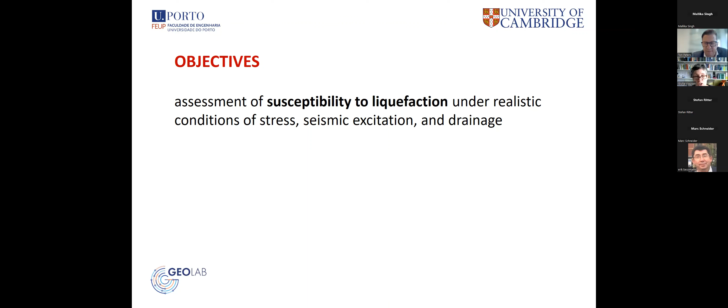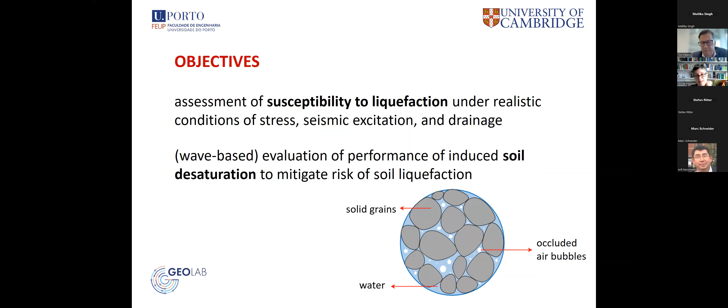So the objectives of the project were to assess the susceptibility to liquefaction of sandy deposits under realistic conditions of stress, seismic excitation and drainage, and to evaluate the performance of a mitigation measure, namely induced soil desaturation, to mitigate the risk of soil liquefaction. Now, this is wave-based in the sense that we were propagating S waves and P waves through a sample of soil while in flight on the centrifuge to see whether this induced desaturation was reducing the risk of liquefaction.

Now, the team was essentially a Portuguese team. The leader was Cristiana Ferreira, who is a research associate professor at University of Porto, and she was assisted by two young researchers, one PhD student from Iran working in Portugal and one research associate from Colombia, and Professor Antonio Viana da Fonseca, who was the most senior member of the team. There was also one intern, Arianna Pucci, coming from Italy and joining the activities of the team during the project.

Now, this is a very experienced team on this topic, both from the point of view of the interpretation of wave propagation methods, both P and S waves, and also the connections between wave velocity, degree of saturation, and risk of liquefaction.

We tested two models. They were both created in Hostun sand at a relative density of 40%, and one of them was fully saturated using methyl cellulose solution, not water. This is to render compatible from the scaling point of view the seismic times, the dynamic times, and the times of consolidation.

And the models were heavily instrumented. So you can see that there were three layers of bender elements. They were propagating S waves and P waves in the direction orthogonal to the direction of shaking during the seismic events.

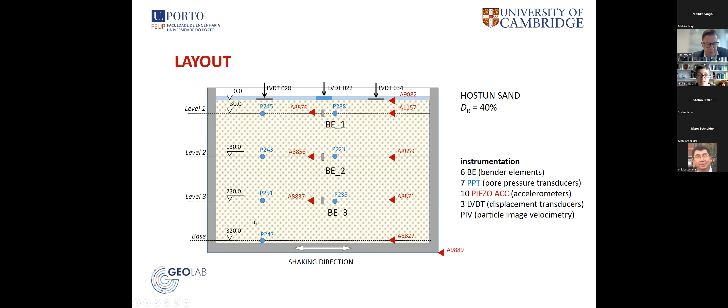And I'm always talking about this induced desaturation. This was created by injecting compressed air from the bottom of the sample in a number of ports. In this way, we were creating bubbles of air inside the soil, and the Bender elements would be in regions where the soil was not saturated anymore. And Bender element measurements of shear wave velocity and observations about excess pore water pressure during shaking were taken for the saturated and the desaturated models.

Now, I don't know how many zillions of traces of Bender elements were acquired during these tests, and I know from Cristiana and her team that they are still busy processing the results, but there is very strong evidence that this technique of induced desaturation was very effective in reducing surface settlements and reducing the risk of liquefaction.

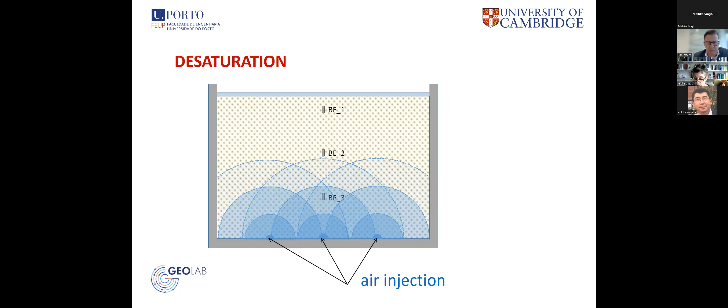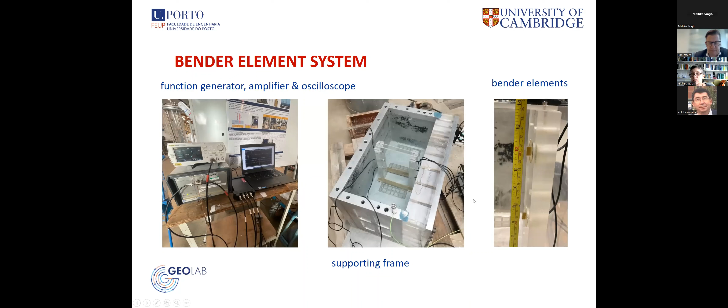These are some slides from the actual experimental work. So this is the Bender element system, which included the function generator, an amplifier, and an oscilloscope. The Bender elements, as I told you, were propagating shear waves in the direction orthogonal to the direction of shaking, and the Bender elements were mounted on this perspex frame. You can see here the Bender elements protruding into the soil sample. So these were shear waves that were horizontally polarized and traveling horizontally.

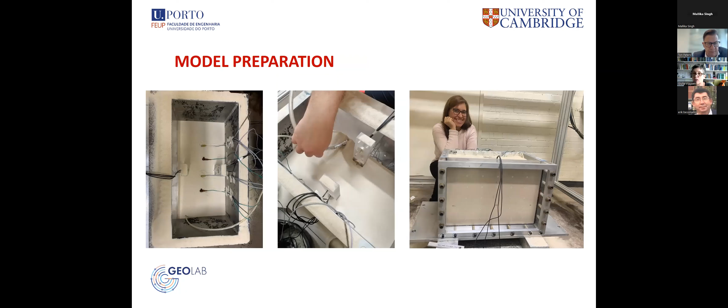And here you can see model preparation. So as the sand is pluviated, the instruments are placed, accelerometers and pore water pressure transducers, at the different heights in which they are supposed to be. Here you can see the two columns of the frame that are supporting the Bender elements. The top of the frame is only connected after the sand has been completely poured. This is more on instrument preparation, and this is a very happy Cristiana Ferreira once the first model was completely prepared. And here you can see the model once it's been placed on the shaking table.

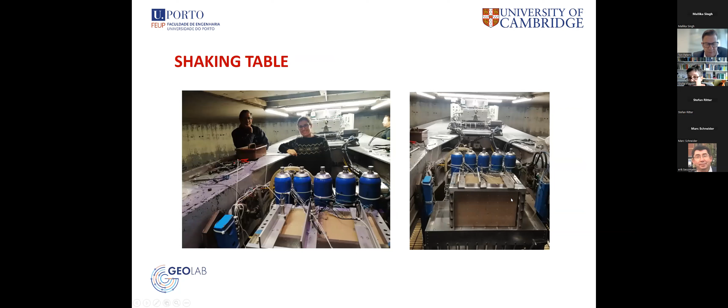So there is this servo hydraulic shaker that can simulate all sorts of dynamic histories. And also you can see here that there are 3 LVDTs that are measuring the surface settlements of the sample directly, besides the PIV, which is done through this perspex window on the sample. Here is Fausto Molina, still in the centrifuge, but the model is absolutely ready to fly. This is a view from inside the Cambridge centrifuge.

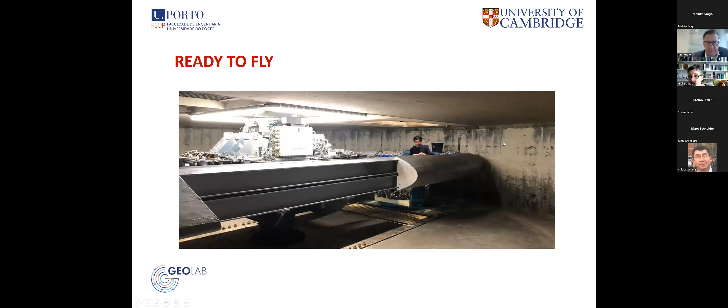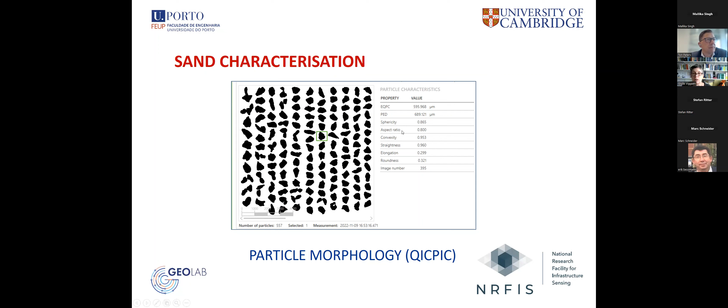And I just wanted to mention that together with the centrifuge testing, which were the main activities, there were a set of parallel activities which took place in the geotechnical laboratories of the Cambridge National Research Facility for Infrastructure Sensing, which included sand characterization. So the Hostun sand that was used in the test was fully characterized in terms of particle morphology using QicPic equipment that looks at the particles as they fall in front of a stroboscopic light, and pictures are taken. So you can look at a number of morphological parameters, including sphericity, aspect ratio, and the like.

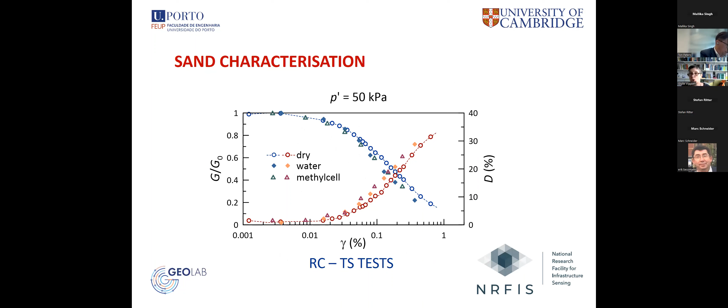And resonant column torsional shear tests were carried out on the sand, in dry conditions, in water saturated conditions, and saturated using the same methyl cellulose solution that was used for the actual tests, so as to have direct measurements of small strain modulus and damping ratio from representative samples of the soil. Now, the sand characterization was mostly carried out by the intern, Arianna Pucci, and by Rashid, the PhD student, who had a lot of fun using the equipment available in the new civil engineering laboratories at Cambridge.

And just to finish, this was a really fun example of teamwork. I think that everybody got something out of it. Cambridge now has a system of Bender elements that can operate in flight, and we're using it over and over again, not just to look at desaturation effects, but also for other effects. And this was a first attempt at cooperating with this team from Porto, but it is pretty obvious that we're going to cooperate over and over again in the future, to say that these transnational access projects are often the way to put in contact different research teams from different countries in Europe, and pave the way to very meaningful collaborative work in the future.